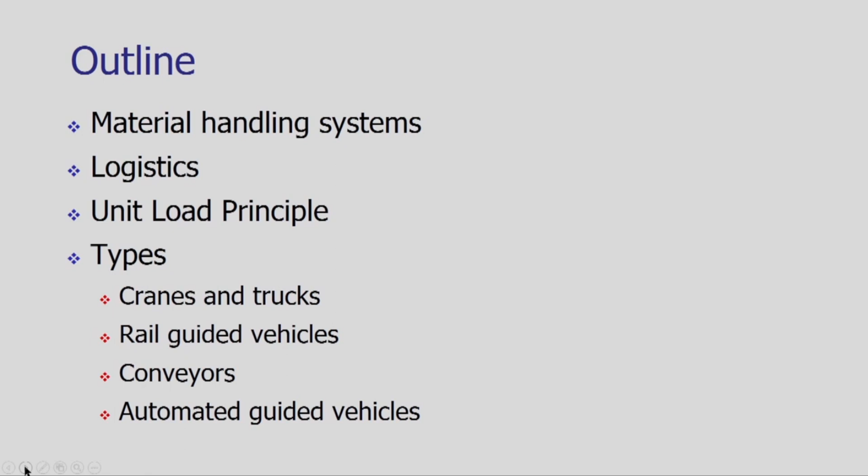So let us begin. In industry or in any shop floor, we are dealing with various materials, parts and products. The materials, parts and products are to be moved. We have to store them, we have to track them, and we have to make a record. And this is quite usual in any commercial infrastructure.

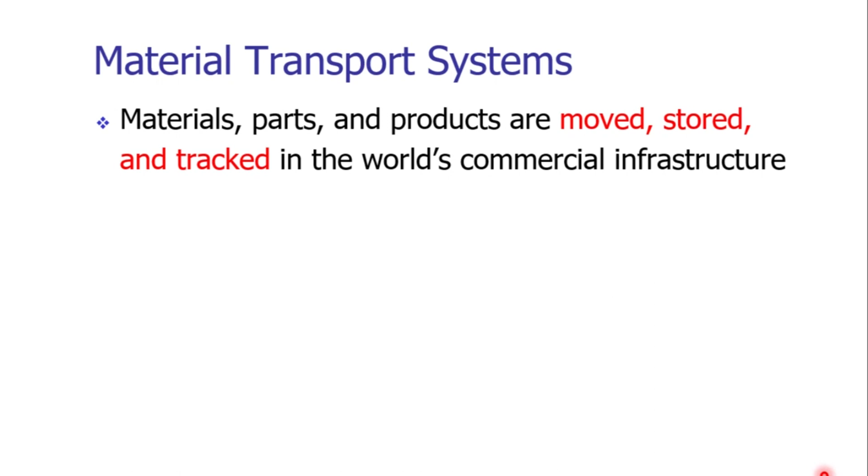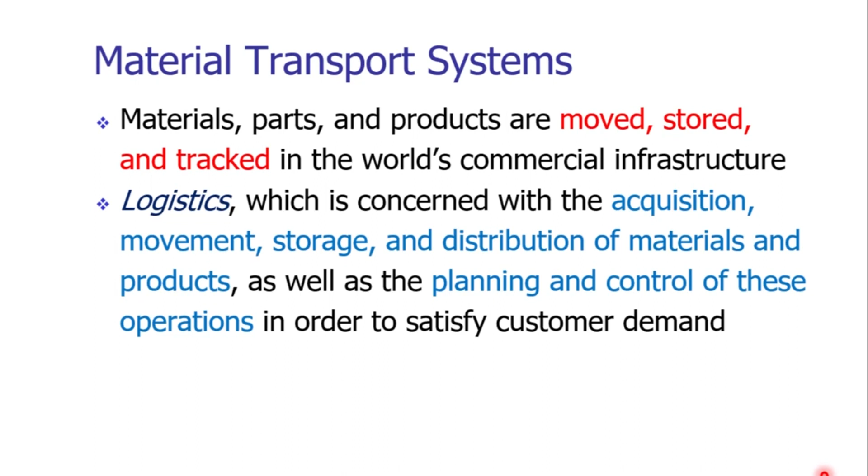The term logistics is often used in relation to materials. Logistics is nothing but acquisition of the material, parts and products, activities related to movement of these commodities, storage of these parts and products, and distribution of them in the factory or in the enterprise. It's not only acquisition, movement, storage, and distribution; the operations related to planning and control of these functions are called logistics. Of course, all these things we are doing to satisfy the customer demand.

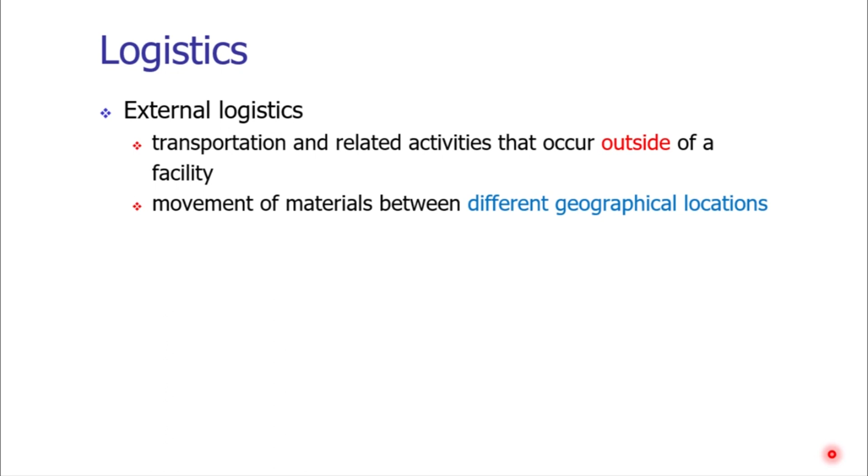Logistics can be external logistics or internal logistics. When we are transporting the goods or the product outside of a facility, the operations related to the storage and transportation of the goods and products outside the facility are called external logistics. When we move the material from one geographical location to another, it involves the transport of raw material, finished goods, semi-finished goods and products from the place of manufacture to the destination, which may be a market destination or a distribution destination.

We carry out the transportation of raw material or finished or semi-finished goods in external logistics through various transport systems such as rail, truck, by air, by ship, or by using a pipeline as well. Fluids, say water or petrochemical gases, are transported through pipelines.

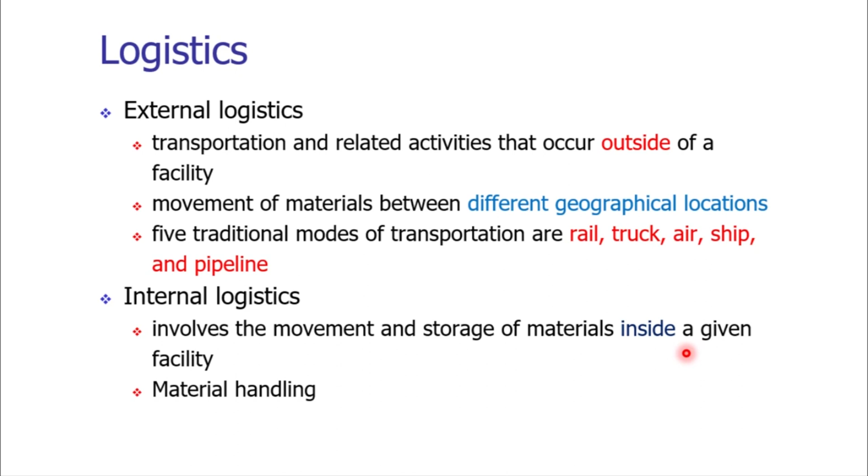In case of internal logistics, we are moving or storing the materials inside a given facility. In an enterprise, various things are needed, and when we are storing them, acquiring them and making a record of all the things, the operations related to this are called internal logistics. The basic and important element in logistics is material handling. In this lecture, we are studying the various material handling equipment that are important for automation purposes.

We need material handling equipment for a variety of operations. The first is the transport operation, and for that purpose we need transport equipment. We need equipment for positioning. We got the material over the conveyor at the destination, but we have to locate it at a proper place. We have to feed the tool to the spindle. So for positioning, we need certain mechanical equipment. These are called positioning equipment.

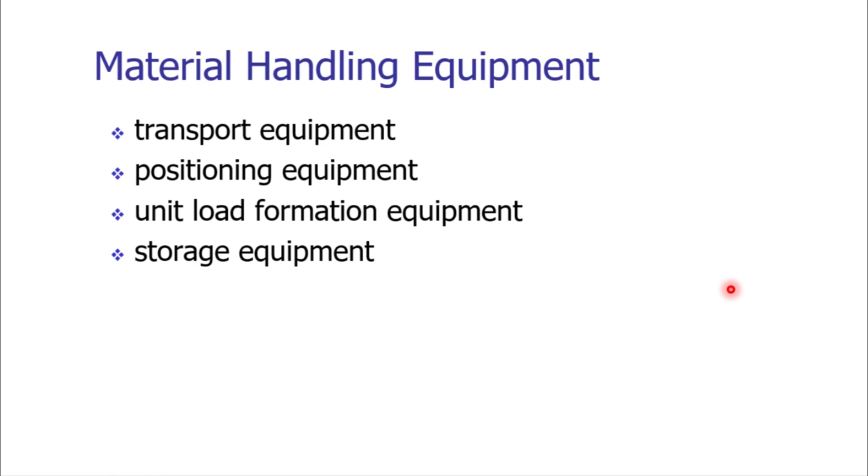Unit load formation equipment: we are taking the commodities together and storing them as a unit. To make the commodities into a unit, certain equipment are used. These are called unit load formation equipment. Storage equipment: a variety of equipment are needed to store the commodities at the workplace. Positioning means we are talking about a specific application. Storing means we need certain equipment to store bulk material, bulk commodities.

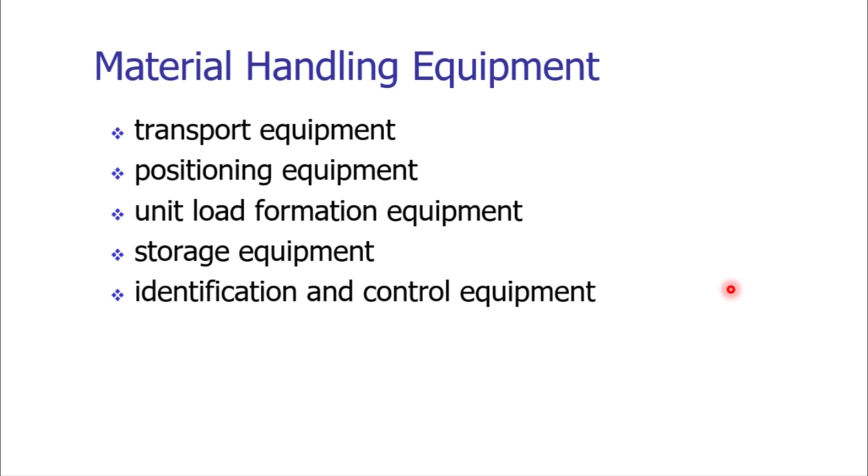In a factory, there are many equipment, tools, raw materials, and finished products. We need to have a proper, efficient record of all these elements. For that purpose, we should have automated identification equipment, and mechatronics based systems are used. It may be barcoding based technology or RFID technology. So identification and control equipment are the fifth type of material handling equipment required in automation in manufacturing.

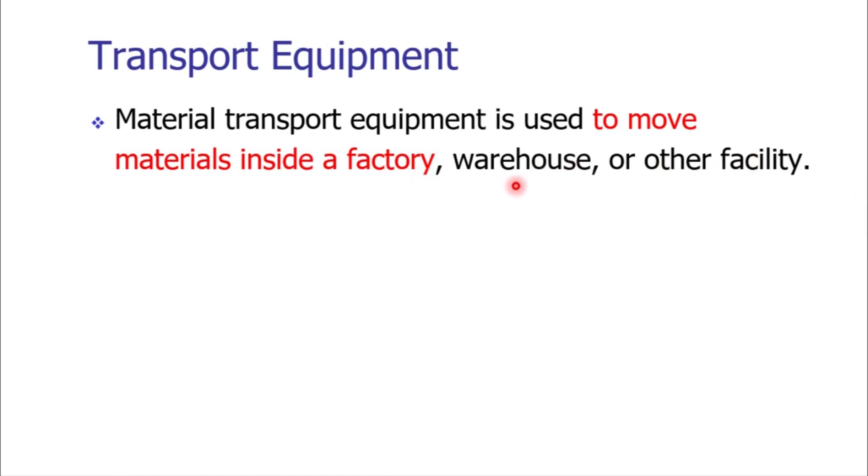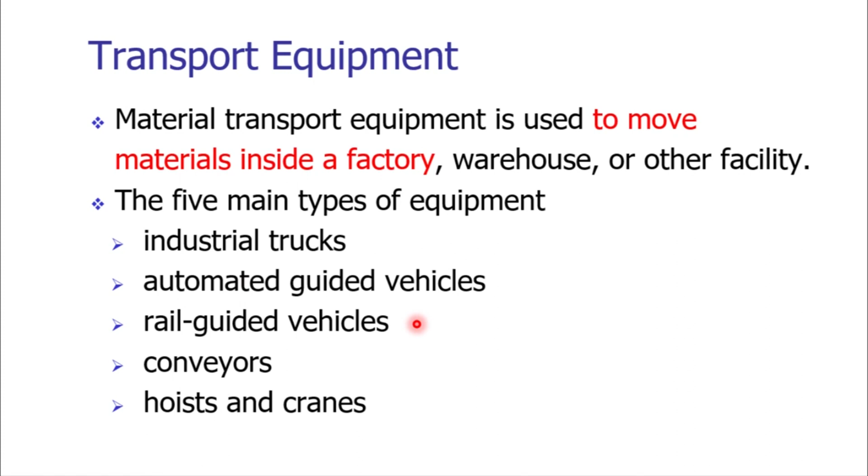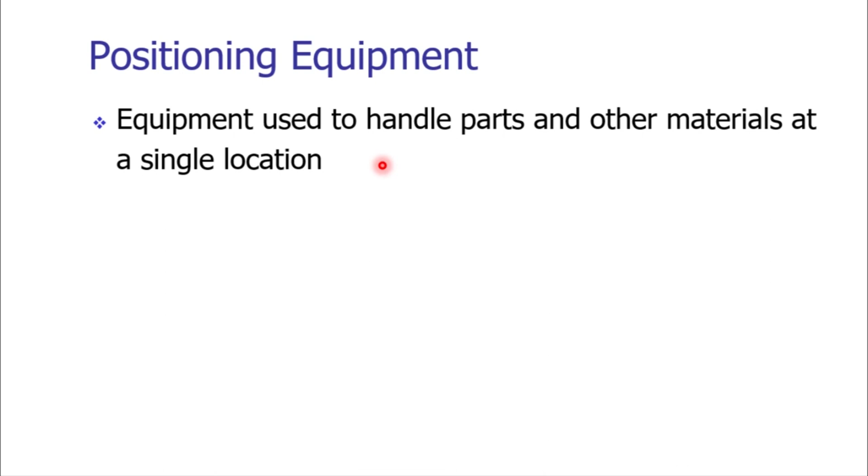The transport equipment, as I mentioned, are required to move the materials inside a factory, a warehouse or the facility. There are basically 5 types of equipment used: industrial trucks, automated guided vehicles, rail guided vehicles, conveyors, and hoists and cranes. Positioning equipment, as I mentioned, are used to handle the parts or materials at a single location only, say feeding or orientation of the tool in the machining center, or a pick and place arrangement at the ASRS.

The loading and unloading of parts from a production machine in a work cell can be treated as the best example of positioning equipment. In general, these activities are carried out by industrial robots, which perform the material handling and part feeding in automated assembly.

For positioning of bulky components or bulky tools, say dies, molds or machine parts, we use hoists, which lift the components and position them wherever it is required.

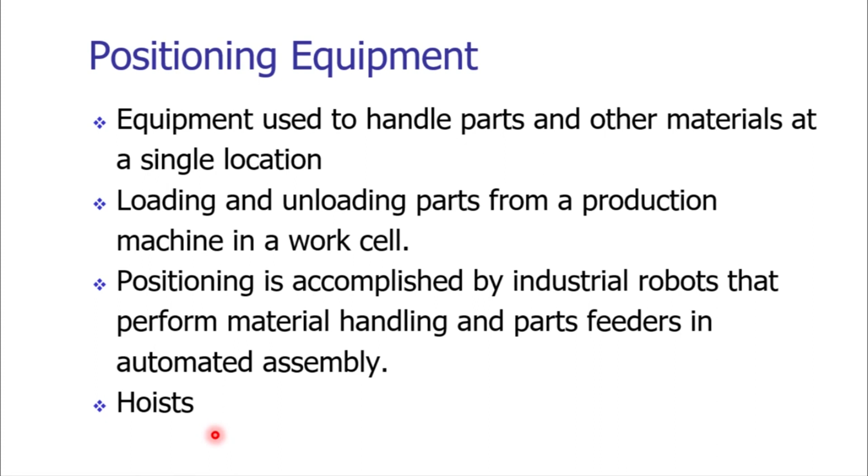Unit load formation equipment. Unit load formation basically deals with making a container which holds the individual items together so that we can easily handle them. So let us consider we have a wooden pallet. The wooden pallet is nothing but a platform of specified, standard size, over which we put the finished products, say boxes, over each other, and a specified number of boxes we consider as a unit of a pallet. After that, we wrap that specified number of packets or boxes together, and that will be considered as 1 unit of 50 boxes, 1 unit of n number of products.

We can also have a smaller version of the wooden pallet. This is a box or a basket kind of thing. In the tote box, we can have commodities such as food products, say fruits, berries or apples. So one tote box of apples will be considered as a unit load.

If the products are heavy, if the products are more, we can have a larger version of the unit load, and that is called the pallet box. In the pallet box, we can have products which are stored in a semi-finished way. So let us consider we are using certain raw material for some operation. We store that in a pallet box, and that will be utilized for the sub-assembly or the processing operations.

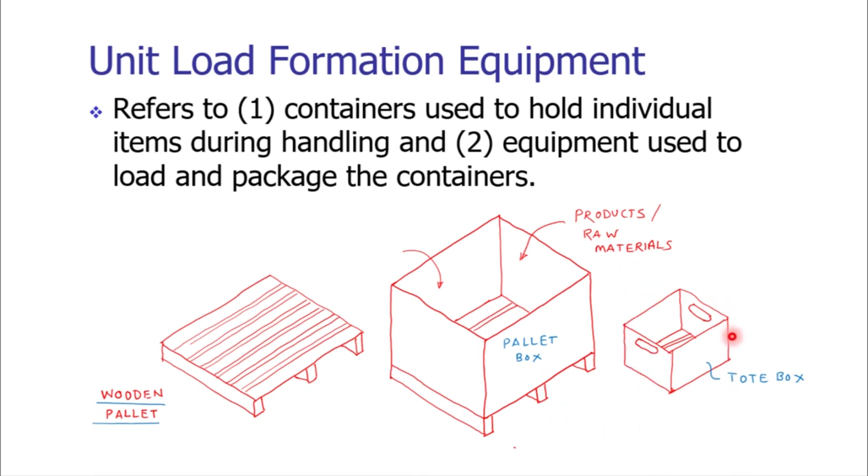Palletizing is basically an operation which automatically shrink wraps the plastic film around the unit load on the pallet, and that wrapped unit of products will be sent for shipping. So the operations related to shrink wrapping the plastic film are called palletizing. We need to arrange the products on the pallet so that they will not fall down, and then we have to wrap them using the plastic film. To carry out this operation, we need automatic machines. These machines are called palletizers.

In a similar way, we also need depalletizers. Consider we have a distribution center of the same enterprise. From the manufacturing unit, we get the palletized products. We now need to depalletize them and unload the cartons from the pallet. To carry out this operation in an automatic way, we need equipment. These are called depalletizers.

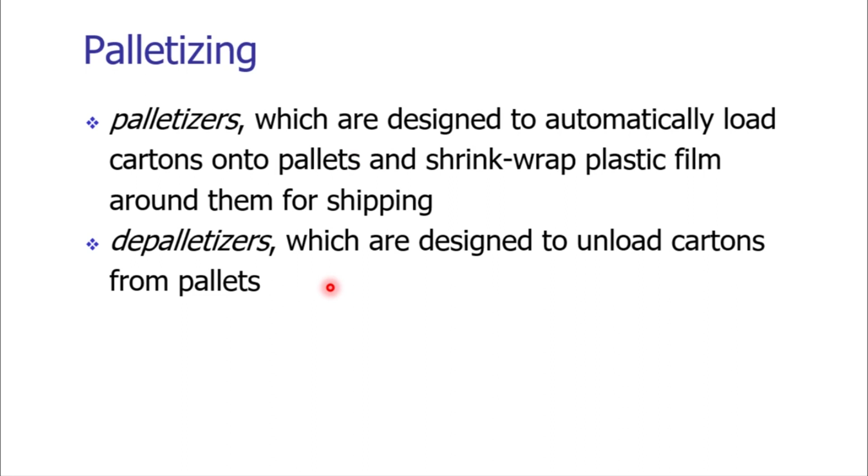Storage equipment. The conventional method is bulk storage, that is, on the open floor area. Consider food grain bags stored in a food grain godown. We stack the food grain bags, and generally this kind of storage is on the open floor area. Even in industry, we use the open floor area for stacking bigger size boxes or cartons.

The rack type of system is the more sophisticated way. The racks are designed to accommodate pallets. We prepare the pallets of the commodities or products, and straightforwardly we can put these pallets inside the rack system. The rack system may have specified numbers, they are coded basically, and we can easily automate the process of the rack system. Such systems are called automated storage and retrieval systems, which have automated racks.

We also use shelving and bins. Shelving and bins are utilized to store smaller components, say screws, nuts, various tools. We use drawers, but handling of shelving and bins is manual. It is labor intensive. Overall, handling of open floor area storage and rack system storage in a non-automated way is labor intensive. So for that purpose, we have to go for an automated storage system, which certainly reduces and eliminates manual labor.

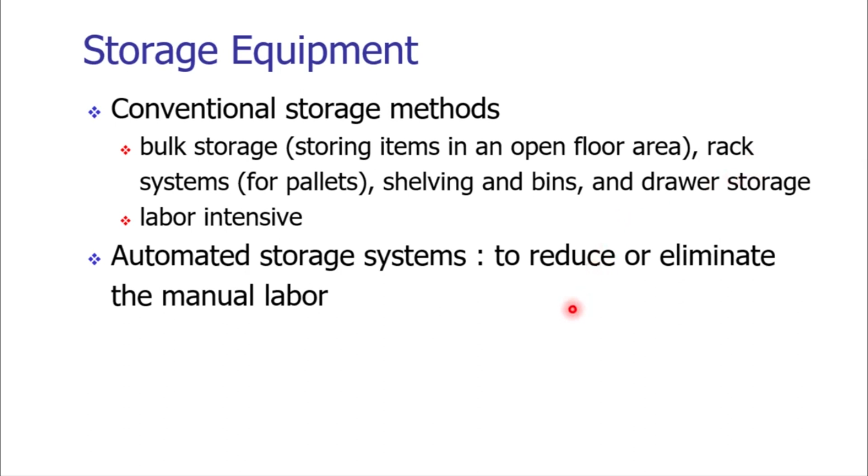When we are automating the process of storage in the racks and handling of the various items inside the rack, that will convert it into an automated storage and retrieval system. As I mentioned before, we have to identify and control these commodities or equipment in the shop floor. We have to keep track of these materials that are to be moved and stored.

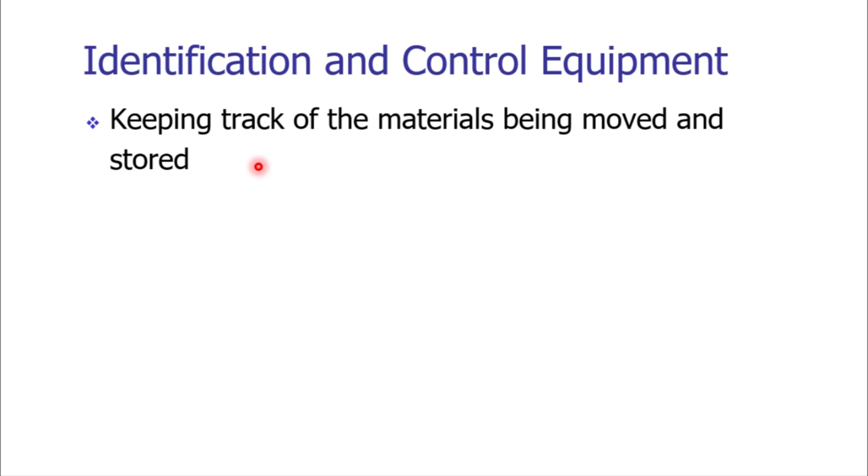So for that purpose, we are using barcode technology, which we often use in the retail markets as well. In the retail markets, in the garment markets as well, we are using RFID technology, that is radio frequency identification technology. Both these technologies are also used in industry. We are first providing the barcodes to the palletized unit loads, and then we can retrieve the specified pallet for either dispatch or for unpalletization or for its further utilization.

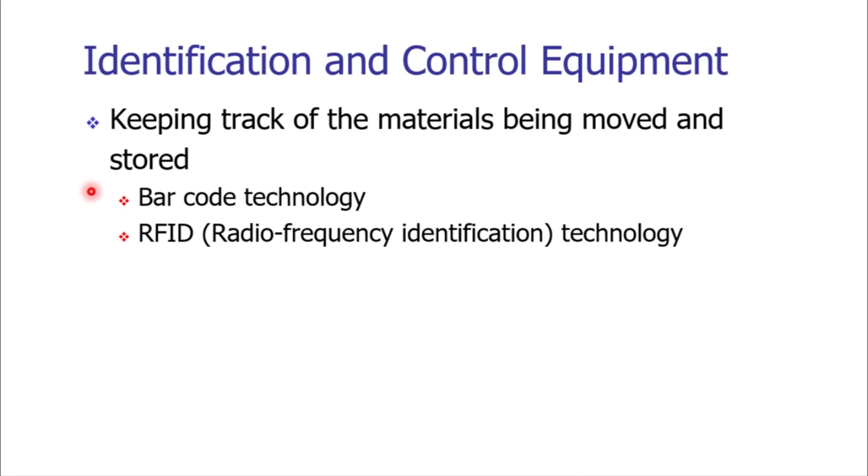Now, what are the various design considerations to be studied? The design of a material handling system basically depends upon the materials to be handled. So what type of material we are handling, what is the quantity and distance to be moved. So when we are choosing a certain material handling equipment, first of all we should know the type of material, whether it is a solid, a liquid material, or a gaseous product. So based on that, we have to choose appropriate material handling technology.

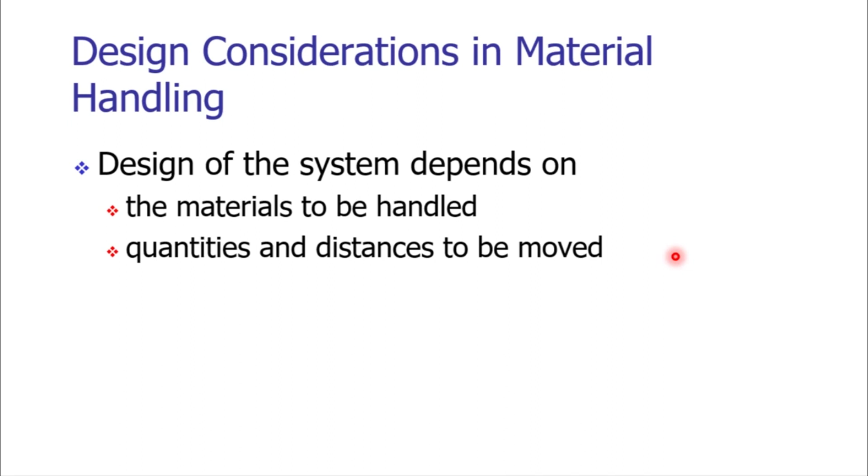Quantities, whether it is a low quantity, medium quantity or high quantity. Then the distance, for how long the material handling has to be carried out, for how long we have to transport the material inside the warehouse or the automated industry. So based on that as well, a suitable choice can be made with the available options with us.

Then what kind of production facility will be served by the material handling system? Whatever the products or commodities we are transporting, for which production operation we are utilizing them. Whether it is a machining operation, painting operation or packaging operation, how much precision is there, whether it is a clean room or non-clean room, or a general purpose shop floor. All these aspects are essential to be considered when we choose or design a material handling system. Of course, the next parameter is the budget, the cost.

So the type of material to be moved, the quantity or the distance to be moved, what kind of application of that material is there during the transportation, and the cost associated with that.

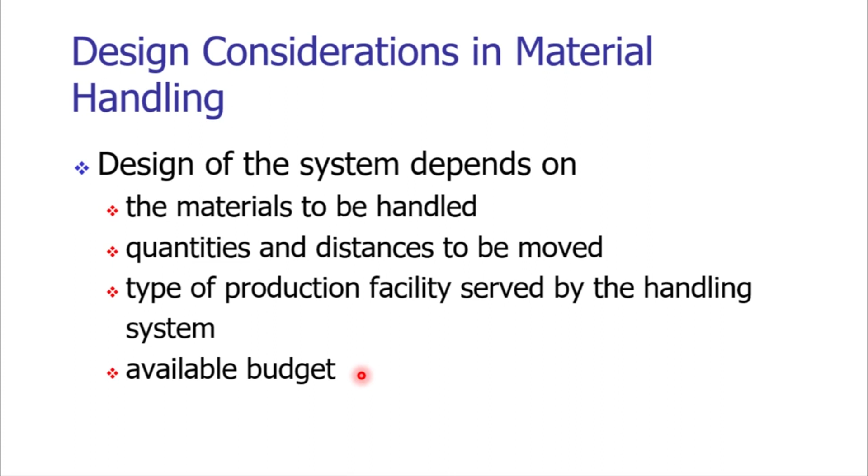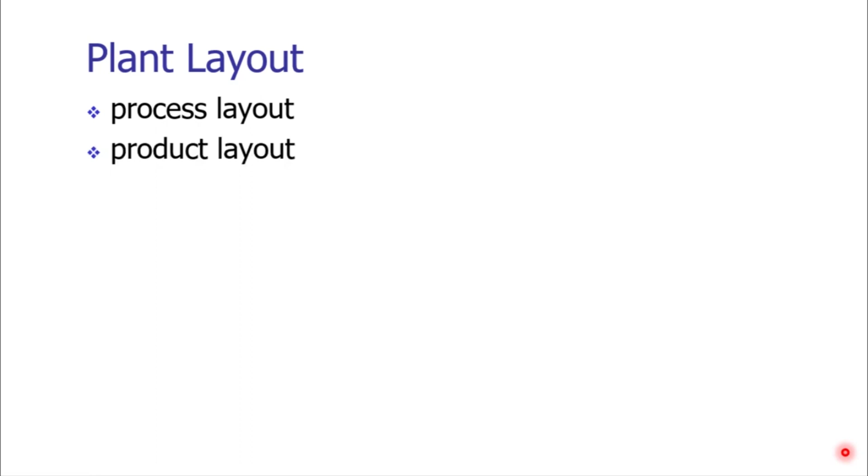During optimal selection of material handling equipment in automation, we have to consider the type of layout of the plant for which we are selecting the material handling equipment. In the industry, basically three types of layouts are used. These are process layout, product layout, and fixed position layout. The layout is nothing but the arrangement of the equipment or facility inside a factory. In process layout, we are arranging the equipment or the facility based upon the similarity of their utilization.

Also we have a testing and inspection or measurement lab where all the finished or semi-finished products will be tested, and tools will be tested and inspected. At the end, we can have the painting, packaging and palletization. So consider there is a part A which is to be processed at the lathe operation, then grinding, welding, then it will go to testing; it will not have any fitting related activity.

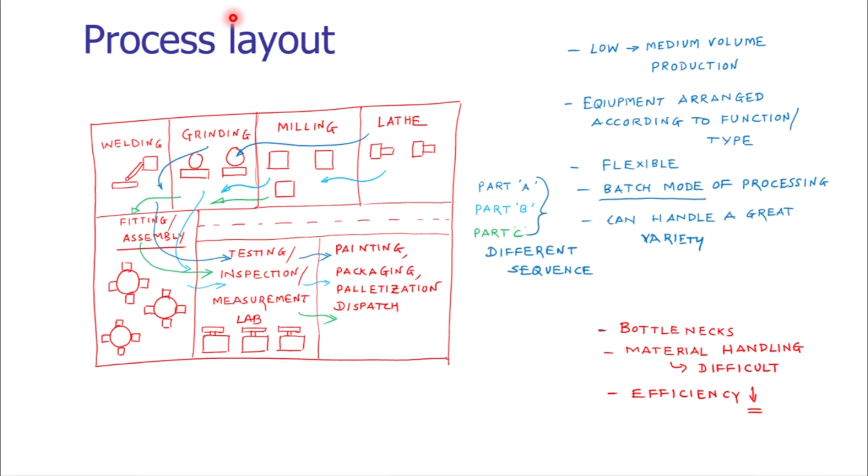Due to the bottlenecking as well, we cannot have efficient material handling. So material handling is difficult in a process kind of layout. Thus, the layout of the company, the layout of the factory, is an important aspect in selecting the material handling equipment during the automation process.

Consider a scenario of high quantity production. The company is having only one product and we have to produce the product at a high volume, at mass scale. In mass production, the production may be quantity based production. A quantity based production means manufacturing of screws and fasteners. If the company's objective is to manufacture only one product, that is the screw, we can have a special purpose machine. We are just producing a large quantity of screws and nuts per day. That's the product and we are just selling it. That is called quantity production, a single product, single commodity, which may not have any assembly.

The second type of mass production is flow line based production. A system is there and that system has a variety of subsystems. These subsystems may be produced in-house or some of the subsystems might be procured from outside; we are outsourcing them. At a rapid rate, we have to assemble the sub-assemblies, the parts which are either produced in-house or outsourced. So for that purpose, we have to have a dedicated transfer line. Such a production facility is called a flow line production facility.

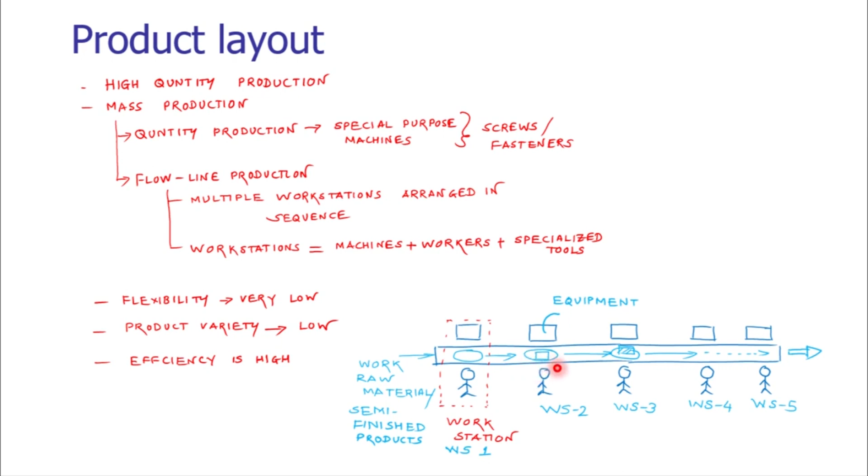But consider in certain cases we are having only one product, one system to be developed. Consider the case of aeroplane manufacturing or ship manufacturing, or we can have an example of railway locomotive manufacturing or heavy machinery. For such applications which are very heavy, very bulky, which are difficult to handle, very difficult to move from one shop to the other shop.

In this situation, we are arranging the workstation, we are arranging the equipment around this product itself, around the system itself. We are taking the machines, we are taking the equipment to the site itself, and then we are carrying out the processing. Such type of layout is called the fixed position layout.

Here consider we are building up an aeroplane, so we need the equipment. The equipment may be a machine. So to get the equipment from the storage to its workplace, we need to have certain material handling equipment. For that purpose, either we can go for forklift type of trucks, or we have to go for the hoist or cranes. We cannot use conveyors here, because if you lay down the conveyors, that will definitely obstruct the material movement of the other operations.

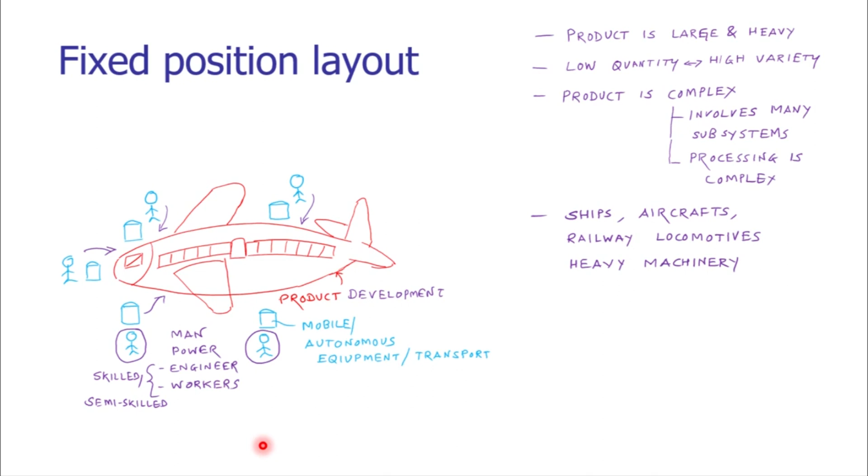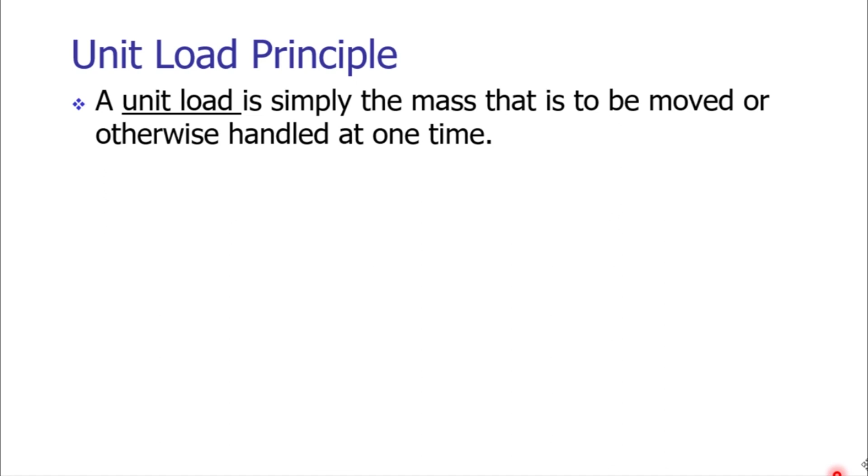So we have seen the term unit load. So let us have the formal definition of the unit load. The unit load is simply a mass that is to be moved or otherwise handled at one time. The unit load may comprise either one part, say only one product or a system which we are putting on the pallet, or we may have a container with multiple parts. These multiple parts are loaded on the pallet, then we are palletizing them, then we are wrapping them with plastic.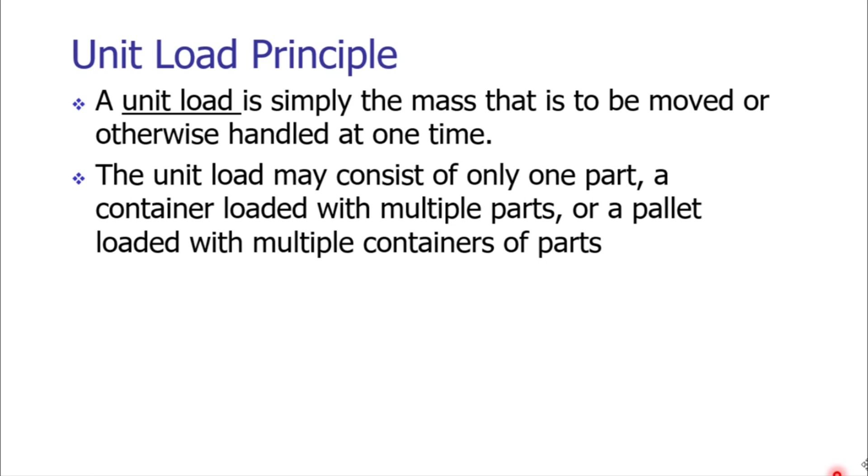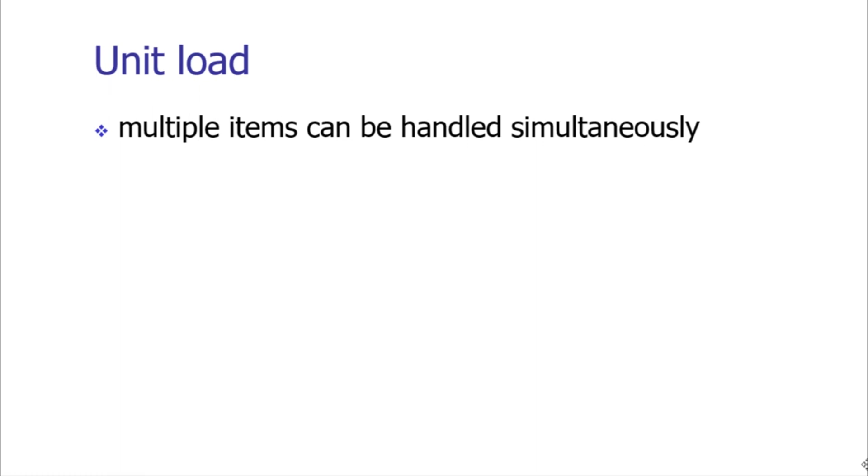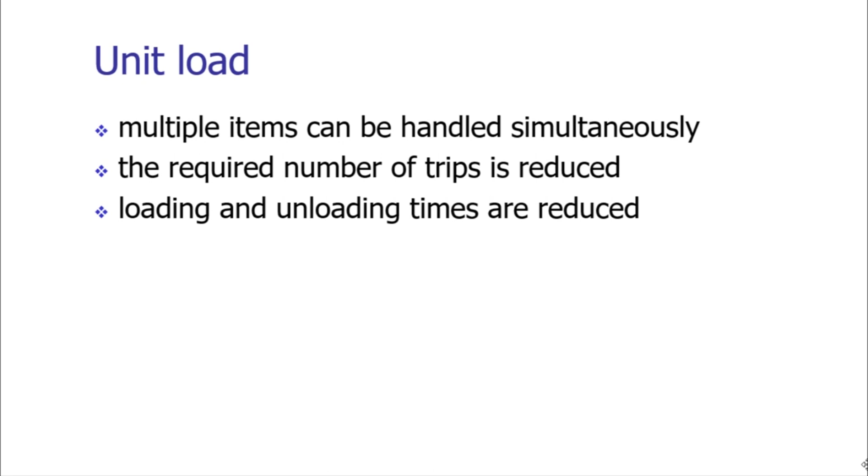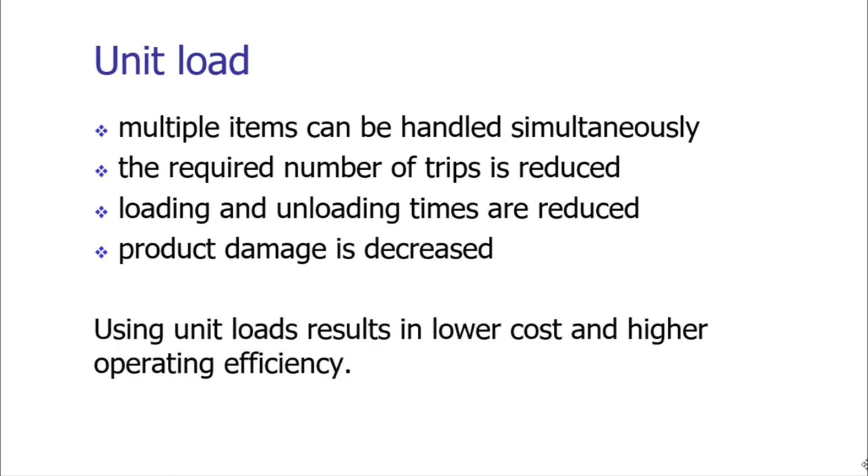We are not handling a single box or a single product. We are handling multiple items which are temporarily bound together. Since the handling is efficient, the product damage would be less. Thus, by using unit loads, we can reduce the cost and we can increase the efficiency.

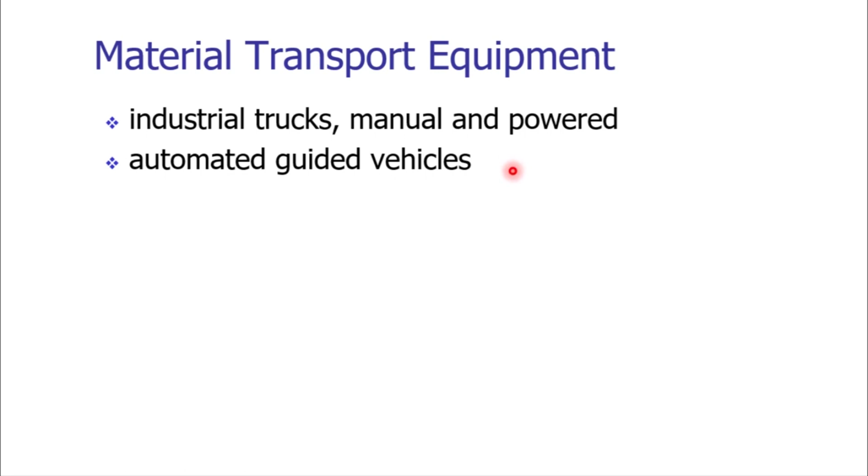There are many transport equipment used in the industry: industrial trucks, which may be manual or powered, automated guided vehicles, rail guided vehicles, conveyors, cranes and hoists. Some simple equipment often used on the shop floor are the industrial trucks. Some examples are there on your screen.

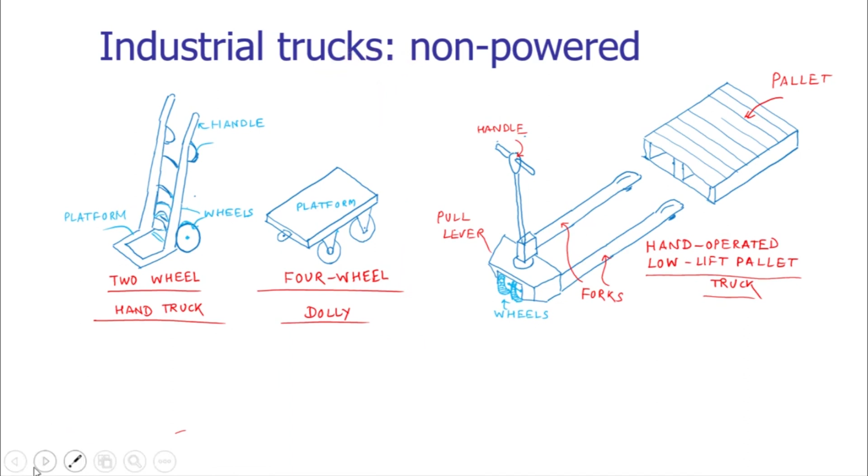As far as the automations are concerned, we are using the powered trucks. Though they are manually operated, these entities are very much useful in semi-automated industry. When we are talking about material handling in process layout or in fixed position layout, to handle the bulkier component, say dies and molds or the tools or the raw material, we need to have an equipment, that is the powered truck or the forklift truck.

So this is a typical arrangement. You can see here we are having the forks and there is a hydraulic system. Hydraulically we are lifting the forks. The lifting is comparatively very high. There is a frame and it is having a very heavy engine. That engine is operating the hydraulic system as well.

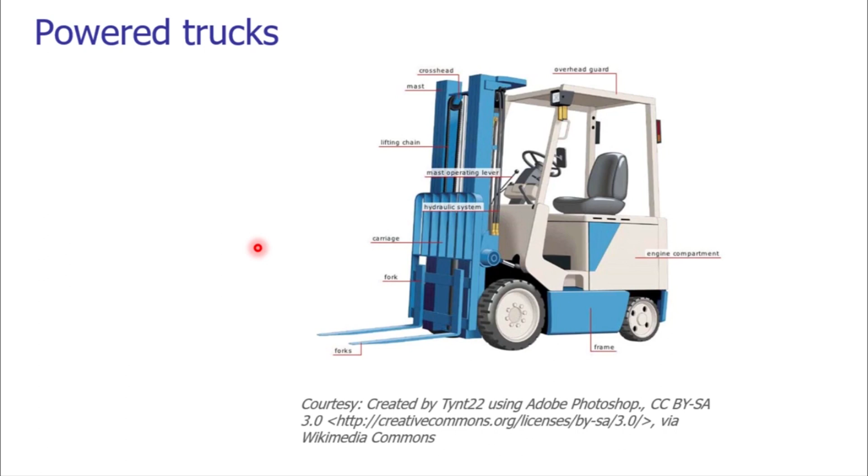By using the hydraulic system, we are operating the forks and the forks are lifting and then we are maneuvering, transporting or conveying the commodities at their desired location. Automated guided vehicles are widely used in automation. These are independently operated, they are self-propelled vehicles, they are guiding themselves. The AGVs are having onboard batteries. The battery life may be around 8 to 16 hours.

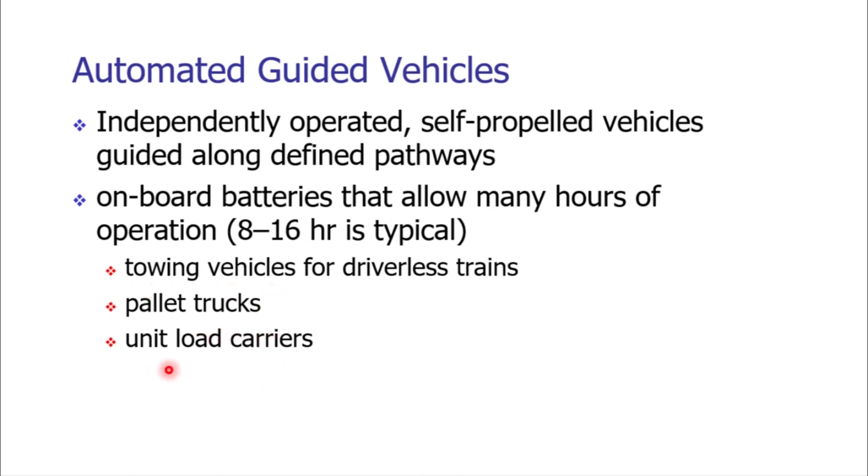There are basically three types of AGVs used in the industry. These are towing vehicles, pallet trucks, or unit load carriers. On your screen, you can see a pallet truck, it's a driverless pallet truck. It is remotely controlled by a central computer, or it is self-propelled or self-controlled as well. It has the forks, and over the forks, a palletized commodity can be seen.

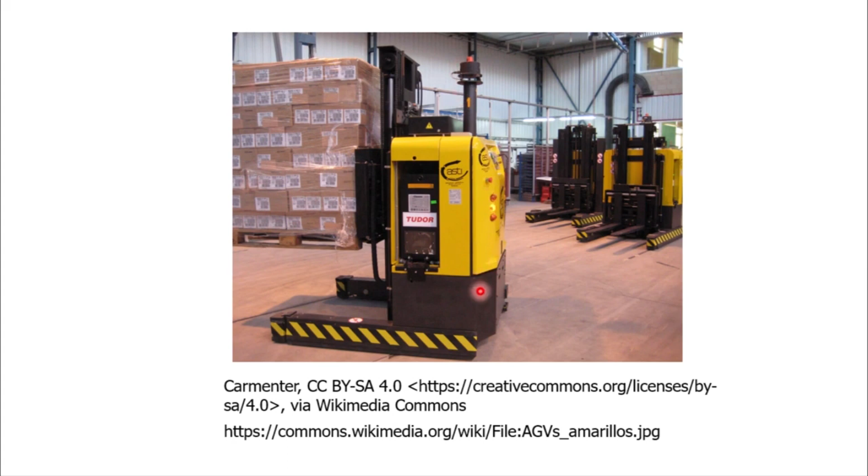So this is the wooden pallet over which a unit load is placed. The unit load can easily be handled by the forks of the AGV. The AGV is having the capability of controlling remotely, wirelessly. This is another variant. It is the unit load carrier. This unit load carrier is having low height and we can handle only the typical unit load for which it has been designed. Only one pallet at one time is being handled by such system.

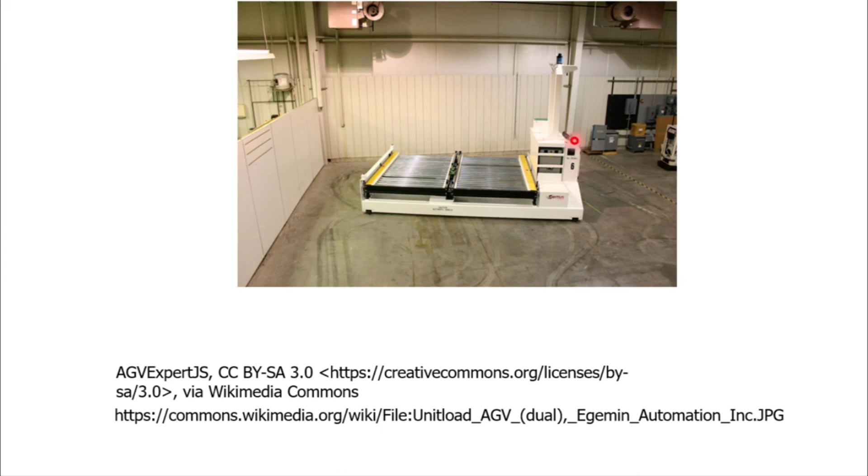The next one is the towing vehicle. Consider we are having an AGV which is driving, which is taking along with it a dolly, and over the dolly we are having the pallets. So we can have multiple dollies arranged in sequence, and based upon the capacity of the AGV, it can drive the dollies. The AGVs are providing the driverless train operations. We can efficiently handle the storage and distribution.

The AGVs are basically used for automated storage and distribution of commodities or the raw materials. AGVs are the integrated part of ASRS, automated storage and retrieval system, which we have seen in our very first week of this course. We have seen one video where ASRS is taking assistance of the automated guided vehicle. How are the AGVs helping? The AGVs are feeding the automated storage and retrieval system.

They are getting the unit loads on pallets from the receiving dock. Consider a truck of raw material has arrived in an enterprise and it is having multiple unit loads. Now AGVs will go to this dock, they will receive the unit loads, the pallets, and then they are feeding the pallets to the ASRS in a systematic manner. The ASRS system is placing these items into the storage.

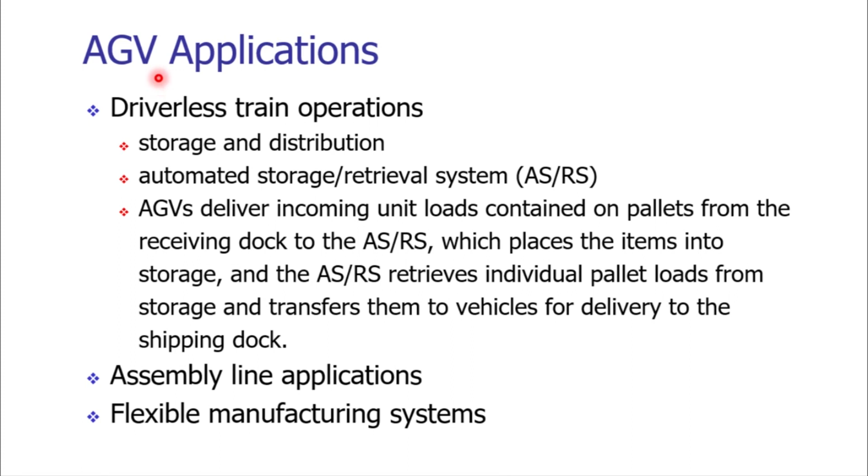There are basically 5 types of guidance technologies used in the navigation of automated guided vehicles. We can use either the embedded wires which are guiding the AGVs. We can have paint strips or magnetic tapes.

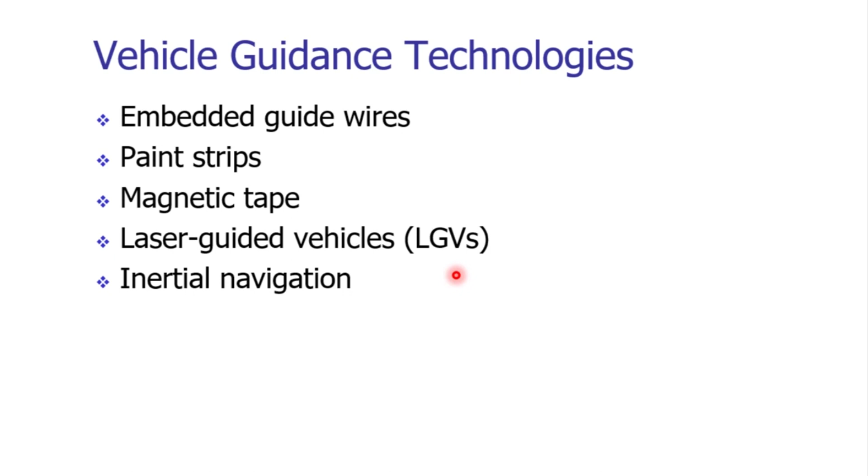Some of the guided vehicles are working based upon utilization of the laser based technology. These are called as the LGVs, the laser guided vehicles. We can also use the gyroscopes for the navigation purpose. These are called as the inertial navigation based AGVs.

Embedded guide wires based technology: we are cutting a slot over the shop floor, and in that slot we are embedding the wire which will be guiding the AGVs. This wire is generating low frequency signals based upon the input which is given. The frequency is around 1 to 15 kilohertz. Due to these low frequency signals, the magnetic field is getting generated, and that magnetic field will be utilized to navigate the AGV along the defined path.

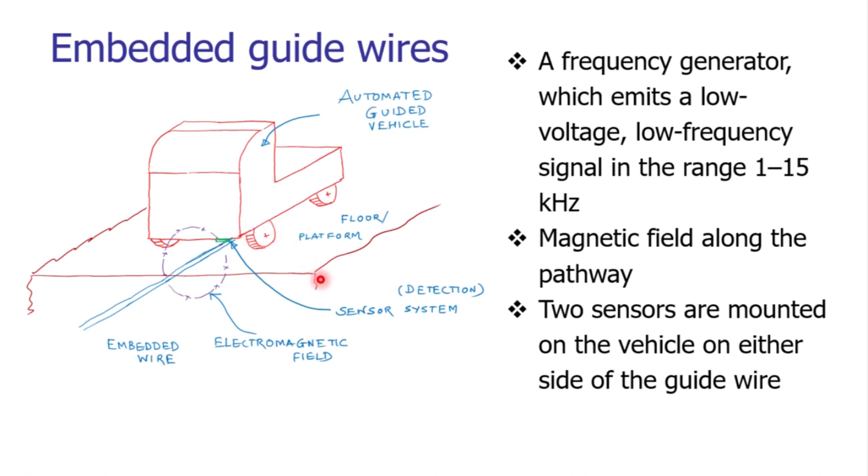The magnetic field will be sensed by the induction based sensors. On your screen you can see the automated guided vehicle which is having the sensor arrangement at its bottom, and the sensor is sensing the magnetic field which is generated by the embedded wire. According to the sensor signals, the navigation or the control unit of AGV will control the speed and direction of movement of the AGV. So what will happen when we are working in loops or branches or side tracks?

To handle these situations in embedded guide kind of technology, we are working with the frequency select method or the path switch select method. In frequency select method, the guide wires in two separate paths are having different frequencies. So in the loops or in the branches or in the side tracks, when we want to change the track, we can have the different frequency of the electrical signals which are there in the guide wires.

So when the central computer is giving instruction to the AGV, or the program of the AGV itself is having the instruction to select a particular frequency or to look for a particular frequency, if that frequency is available along the branch path, the AGV will follow that. So at branching, if the programmed frequency is matching with the available frequency of the branch path, the AGV will follow that particular path. Or we may have the path switch select method.

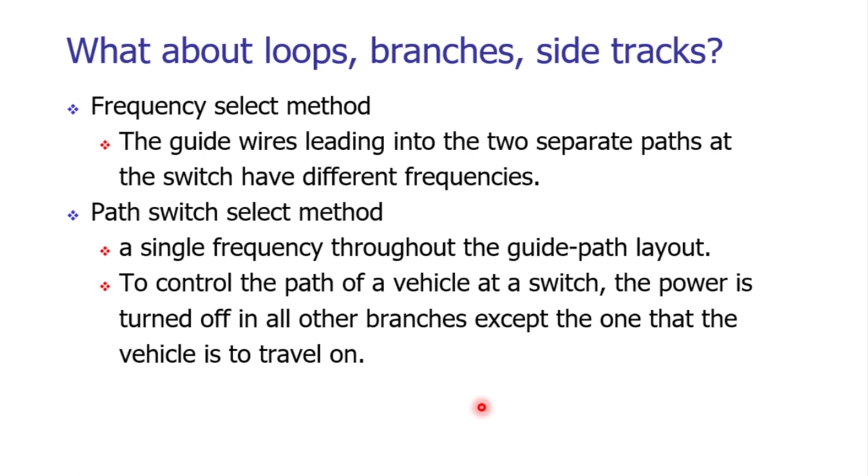So when we are having the options, the option that is to be chosen, we are giving the electrical signals to that particular option only. The electrical signals or the magnetic fields at all other paths will be switched off. So we are switching off the electricity to all other not required paths. Whatever the path is to be utilized, that particular path signal will be on. As it is on, the AGV will follow that particular path and it will convey the product along that path only.

We can have the navigation by using strips which are painted. These strips are having fluorescent particles which are reflecting the ultraviolet light. The onboard sensor of the AGV will detect that light. It is a phototransistor. It will detect the light and accordingly it will get maneuvered along that particular path.

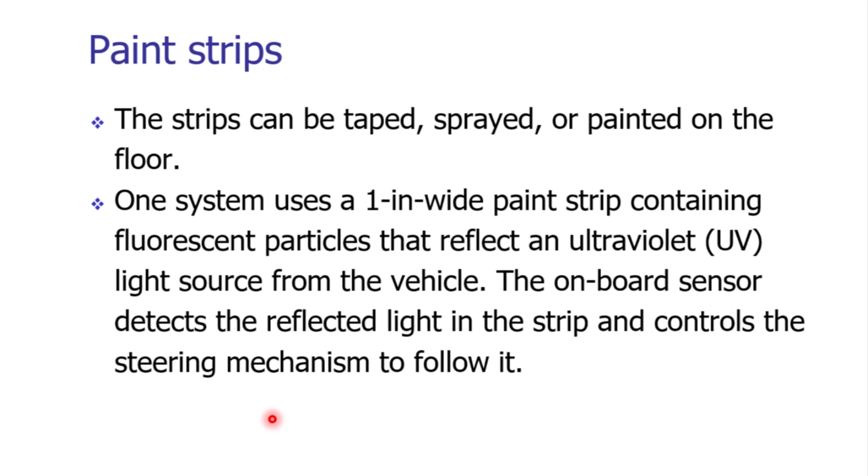We can also have the magnetic tapes. So instead of having the painted arrangement, we can have the magnetic tapes which are installed on the floor surface along the defined pathways. The magnetic tapes arrangement is avoiding the cutting of floor surface, which is there in the embedded wire technology. We have to cut the floor system, so that can be saved by using the magnetic tape arrangement.

We can easily redefine the path. If we remove the magnetic tape from the floor, we can rearrange, we can relocate the magnetic tapes and we can change the path very easily. The magnetic tapes are generating passive signals. In the embedded wire technology, the active signals are being generated, but in magnetic tape it is passive signals, which of course need to be converted into active signals by using signal processing devices.

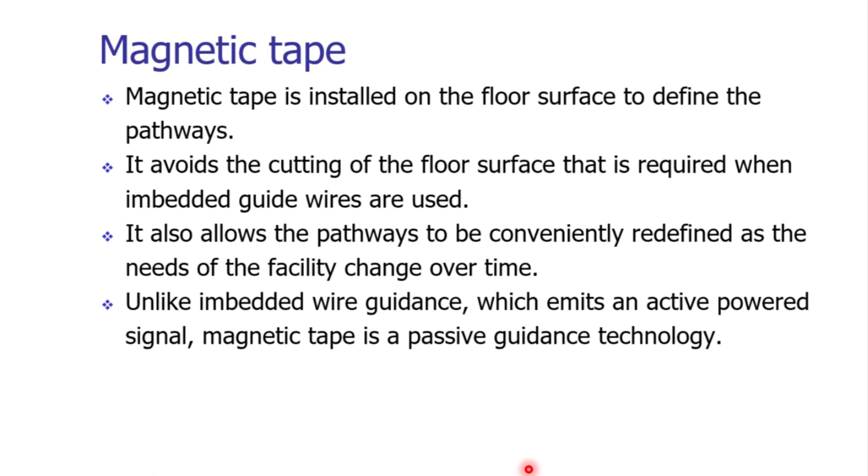We can use lasers for the navigation purpose. In laser-based AGVs, there is no need of any wire which is embedded. There is no need of any magnetic tape, or we may not require the painted strip on the floor. In laser-based AGV, we are using a combination of dead reckoning and reflective beacons. A beacon is a mechanical element which is having reflectors on it.

Various reflective beacons are arranged in the plant and the AGV is having a laser. The laser is being continuously transmitted from the AGV. That laser will strike the beacon and from that beacon it will get reflected. The reflected signal from the beacon will be stored inside the processing unit of the AGV.

And that stored information will be utilized to know the current position of the AGV, and it is utilized to compute the destination that is to be achieved. Dead reckoning is a term that refers to the capability of a vehicle to follow a given route in the absence of a defined pathway in the floor. So it is basically a system which is making the AGVs capable of finding the path or following a path when a defined pathway is not available on the shop floor.

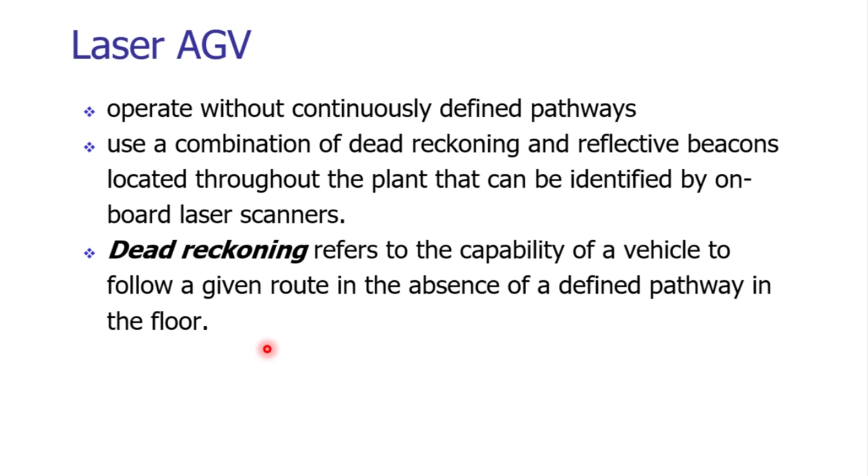We are not having any embedded wire technology. We are not having any magnetic strips. We don't have any painted strips over the floor. The AGV is free to move, and based upon the beacons which are available, based upon the programming it is having, the AGV is taking its own control and it is moving on its own inside the shop floor. So this particular capability of having navigation control in the absence of the defined pathway is called dead reckoning.

In the laser AGVs, the movement of the vehicle along the route is obtained by computing the required number of wheel rotations. So during the movement of the AGVs, the number of rotations of the wheels are computed. A servo motor or a stepper motor may be there, and that number of rotations is utilized to get the required location of the AGV. The computer is computing the present location of the AGV based upon the number of rotations. Of course, the steering angles also need to be considered to get the required destination as well.

Inside the factory, the reflective beacons are located strategically at a variety of places. The lasers are sending the laser energy, that is photon based energy, and the AGVs are getting reflections. The reflections received from 3 beacons inside the shop floor can be utilized for triangulation, to find out the present location of the AGV. Of course, the reflections from the beacons and the methodology of dead reckoning made the AGVs self-propellant, self-sufficient to take their own pathway inside the factory.

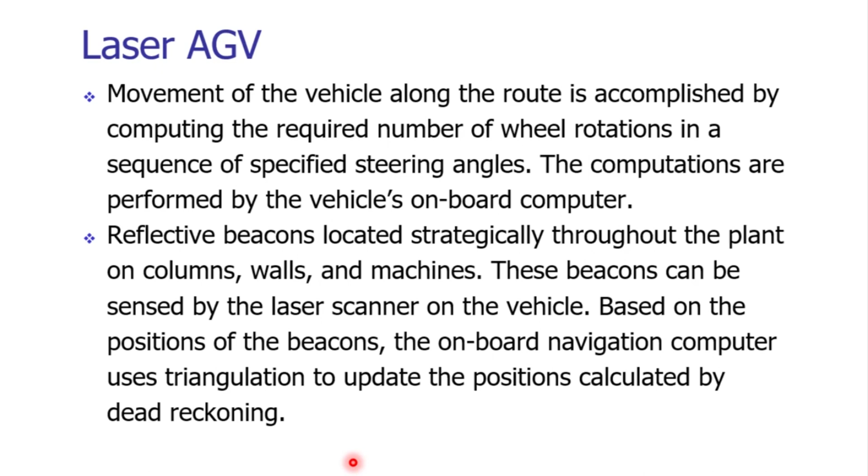We can also have inertial guidance. In inertial guidance, basically we are using onboard gyroscopes and motion sensors to determine the position of the vehicle by detecting the changes in the speed and acceleration. So gyroscopes are mounted, and these gyroscopes and motion sensors are continuously computing the speed and acceleration, and based on that the microprocessor of the AGV is continuously recording the position of the vehicle. Similar technology is used in aircraft, submarines, and missiles.

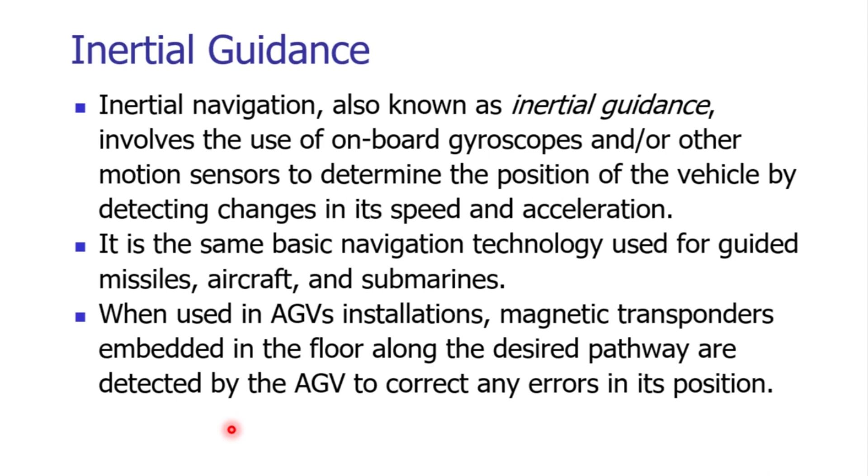In addition to the gyroscopes, these AGVs also have magnetic transponders which are embedded in the floor. These are additional systems ensuring whether the AGV is following the correct path or not. So basically, the AGVs are very much useful in process layout kind of manufacturing automation. In the manufacturing industry, we are using cranes to handle or to lift heavy loads, heavy parts. The heavy loads or heavy parts may be dies, molds, machinery, raw material.

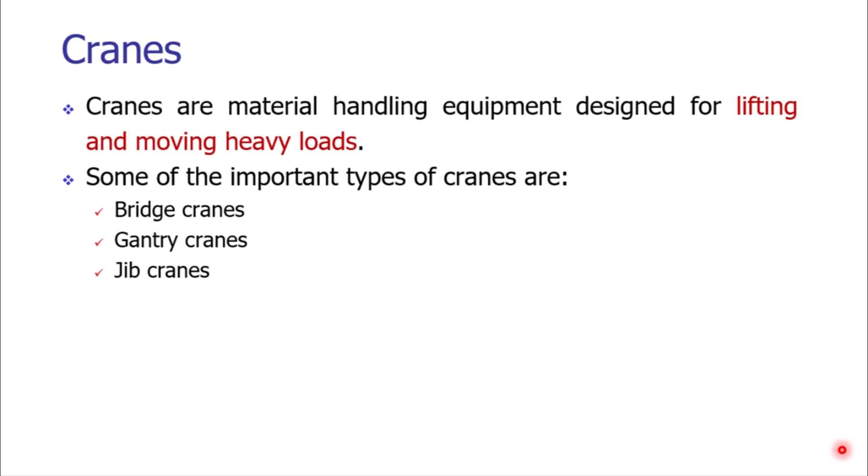There are 3 types of cranes which are used in the industry: bridge crane, gantry crane, and jib crane. In a bridge crane, there are one or two horizontal beams which are supported on fixed rails on either end, and these horizontal beams are moving in the direction perpendicular to the plane of paper. These horizontal beams are hosting the hoist. This is the hoist, and this hoist is moving along the X direction. We can move the hoist along the length of the horizontal beam. So let us consider this is the x-axis movement of the hoist trolley.

The horizontal beam is moving perpendicular to the plane of paper, that is the Y direction, and that perpendicular movement is possible by using these two rails. These rails are supported by supporting columns. The end of the hoist can be moved along the vertical direction, that is the Z direction. It will come down, it will lift the object, and then we can move the object or the product along the X direction or along the Y direction.

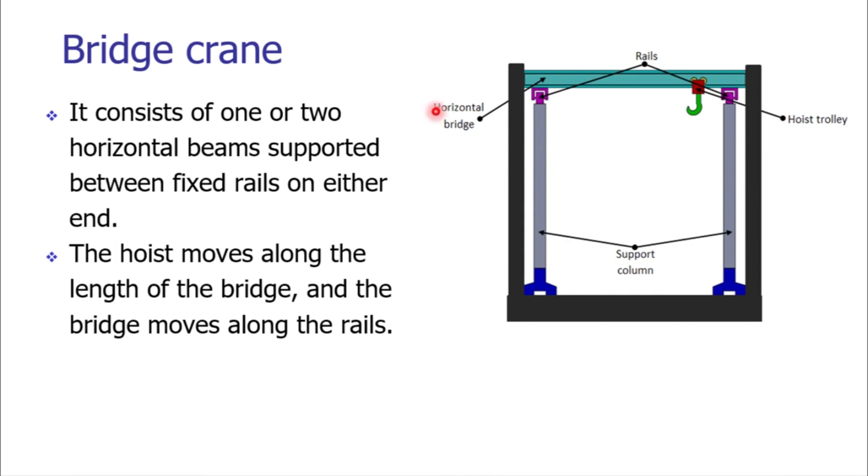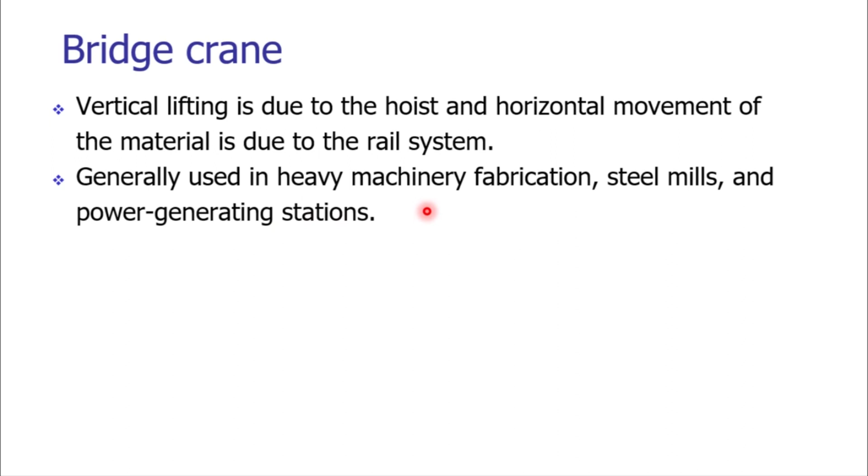The bridge crane is basically used to handle heavier objects. So in big manufacturing industry, when we want to handle very huge size work parts, components or machinery, bridge cranes are utilized. In a bridge crane, the vertical lifting is carried out by using the hoist, whereas the horizontal movement is done by using the rail system. So as I mentioned, the bridge crane is used to handle heavy machinery, in steel mills, and it is basically used in power generating stations where we need to handle impellers and turbines of a large size.

The next version is the gantry crane. It is very similar to the bridge crane itself, but the handling capacity of the gantry crane is lesser than the bridge crane. In gantry crane, we are also using a bridge which is supported at one end on the runway and the rail, which is hosted on a support column.

The other end of the bridge is supported by a gantry leg, and the gantry leg is moving over a rail. The arrangement of the gantry crane is smaller, and we can handle small or medium type of work parts. Not very huge work parts are being handled by the gantry crane. The gantry crane we can move inside the warehouse, inside the shop floor or the factory. We can take the crane anywhere we want and we can handle the work parts.

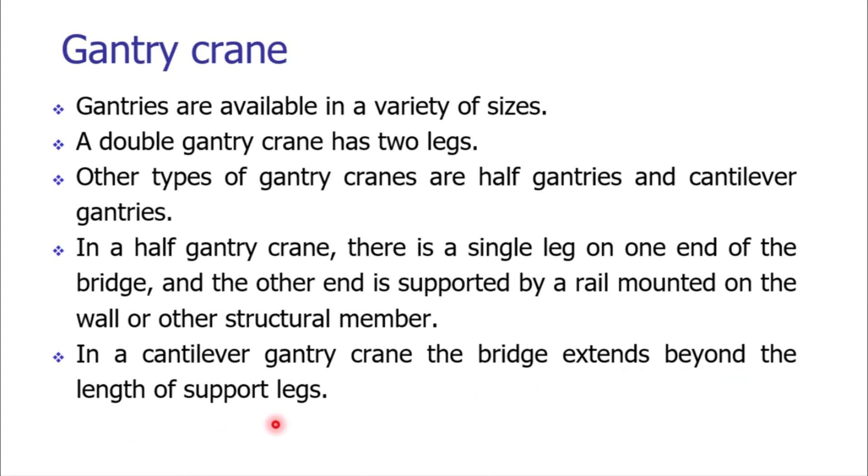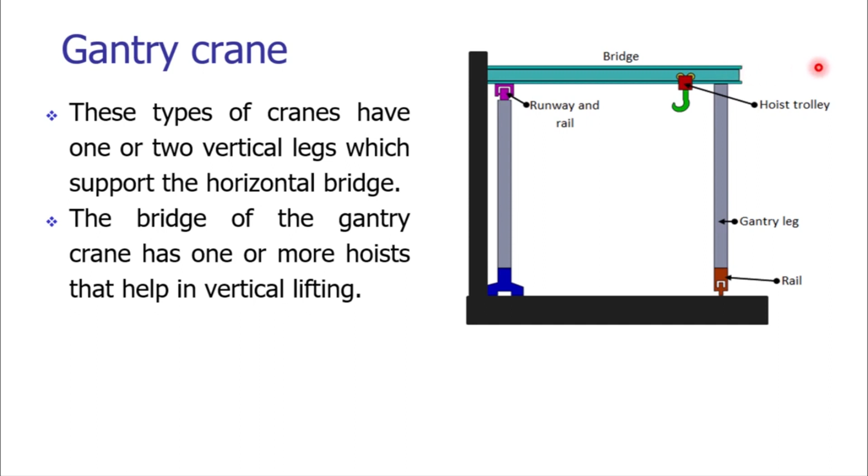The third variant of crane is jib crane. In jib crane, we are using a movable arm which is pivoted to a fixed column. This movable arm is hosting the hoist. Hoist can be moved along the length of the arm. Suppose there is the work part or the commodities which are placed on the floor, the hoist will come down and will lift it. The movable arm can rotate about the axis of the fixed column.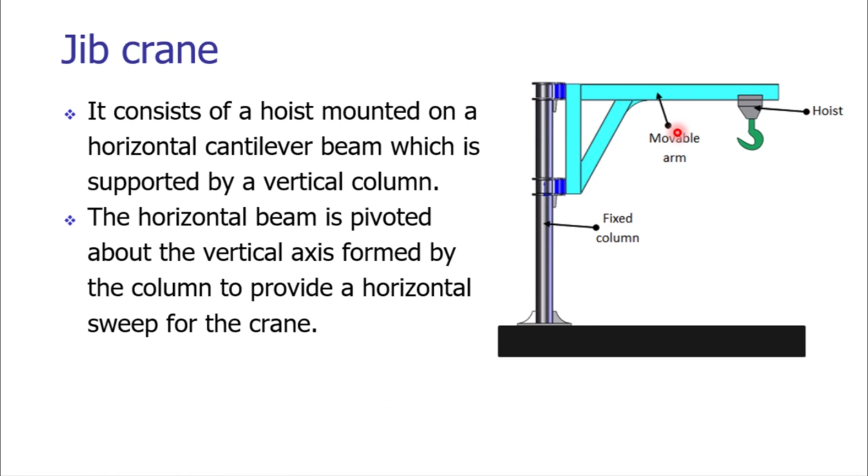So it can rotate about this axis so that we can cover up considerable area inside the shop floor. The hoist is moving along the length of the movable arm, and the horizontal sweep of the jib is circular or semicircular. So if it is circular, it can cover up the considerable area and we can utilize the jib crane for wide variety of applications. The movable arm is providing the radial travel to the hoist. So we can have the radial travel along this direction away from the center of the column.

The movable arm can sweep about the jib axis. It may be circular or semicircular form. And the hoist is moving in a downward direction, lifting the work part up, and then it is moving in the upward direction. Then either it can move in a radial direction towards the center of the column, or it can be rotated about the column of the jib crane itself.

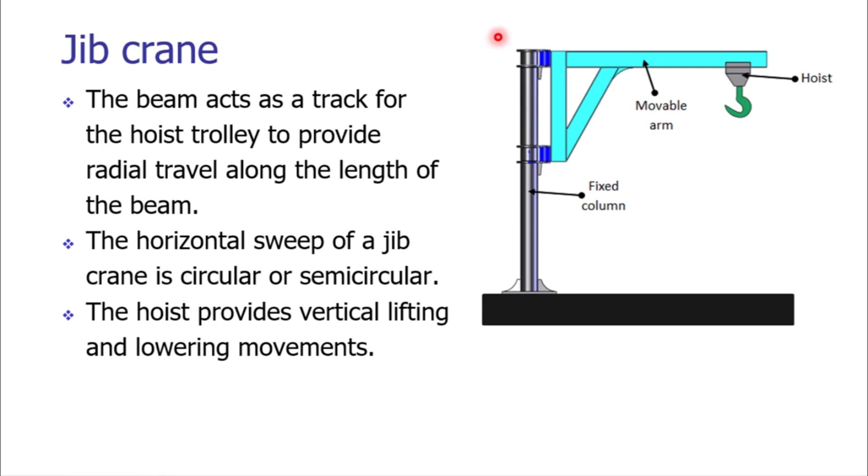The manufacturing industry also employs rail guided vehicles. These equipment are consisting of motorized vehicles which are guided by fixed rail system. The typical motorized vehicles are there which are fixed to the rail system. These vehicles are self propelled. They are getting propelled by themselves only. They are operating independently and are driven by electric motors. So these are the electrically driven vehicles and they pick up the power from the electrified rail.

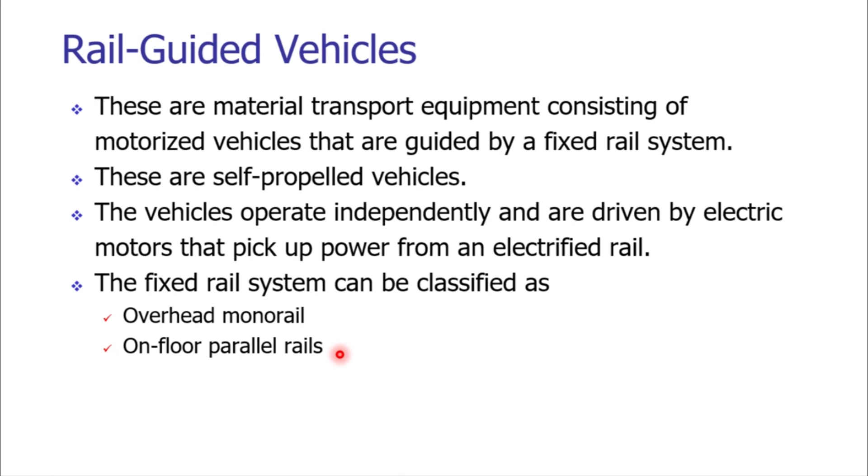We can have basically two classes of the fixed rail system, and these are overhead monorail or on floor parallel rails. In overhead type monorails, the rails are suspended overhead. They are suspended from the ceiling. As the work parts or the machinery or the raw material is being carried out in overhang position, we can save a lot of floor space when we are employing the monorails. The work parts are moving along the rails which are mounted above the floor space. So the ground space can be utilized, it can be saved for other operations or some other purpose as well.

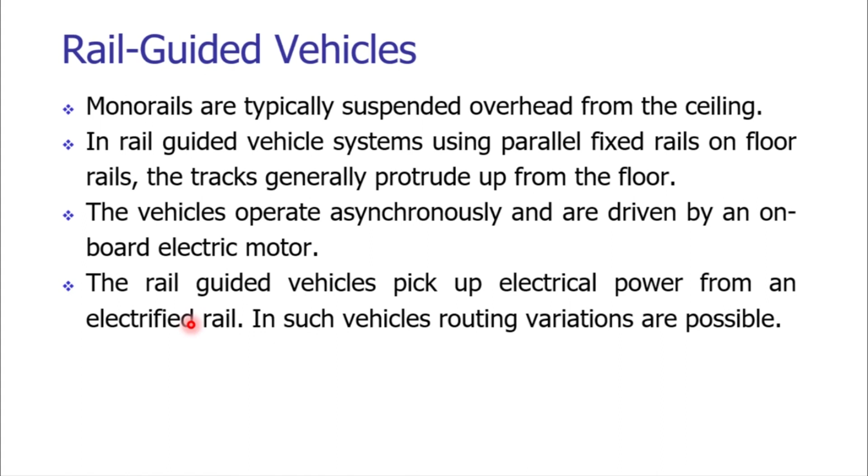In rail guided vehicle systems using parallel fixed rails, the tracks generally protrude up from the floor. So we are having typical rails which are protruding up from the floor and over which the vehicles are moving. The vehicles are moved in an asynchronous way and they are being driven by the onboard electrical motors. Basically, the rail guided vehicles are picking up the electrical power from the rail itself, and in such vehicles we can easily have the routing variations. We can change the route or we can change the speed of the electrical vehicles easily.

The manufacturing industry also employs or utilizes conveyors, particularly in the product layout kind of system where we want to get in the raw material at one end of the flow line and the finished product would be done at the other end of the flow line.

The conveyance of the raw material from one end to the other end has to be in a continuous mode or in intermittent mode based upon the requirement of the operation. So that is possible by using the conveyors. When we are supposed to handle the large quantities or the volumes, the conveyors are best suited.

We can have non-powered conveyors or the powered conveyors. In non-powered systems, human intervention is required. We have to employ the human workers to handle these systems, or we can utilize the gravity. We can have the slope and roller type of conveyors, and by using the rolling friction and the gravity we can easily convey the materials.

The powered systems are more sophisticated, systematic ways to convey the commodities; of course we have to spend the power to get the required work done. There are various types of conveyors such as the roller, skate wheel, belt, in-floor, tow line, overhead trolley conveyor and a cart on track conveyor, which are used in the industry. So some of the conveyors we will see now.

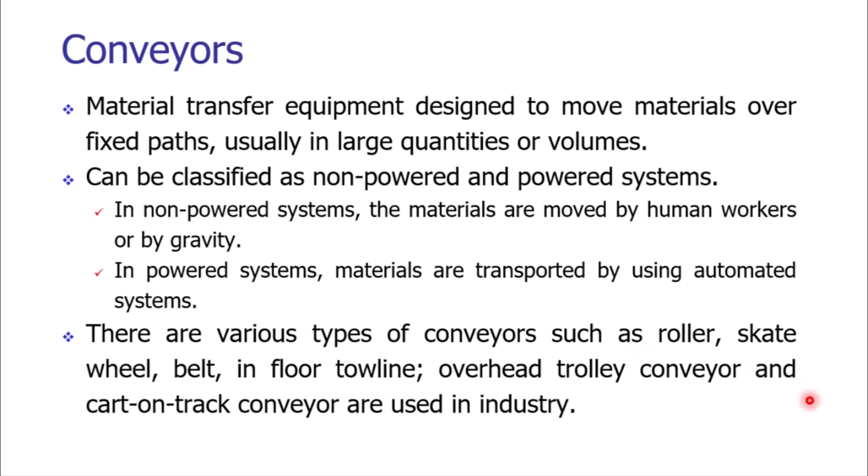The roller conveyor is the basic and simple example of the conveyor system used in the automation. It comprises a series of rollers which are perpendicular to the direction of travel. The construction is very simple. We are having two frames, two guideways, and there is a set of rollers which are connected in between these two guideways. We are using the rolling friction here. The cartons which are having flat bottoms can be easily conveyed over the roller based conveying system.

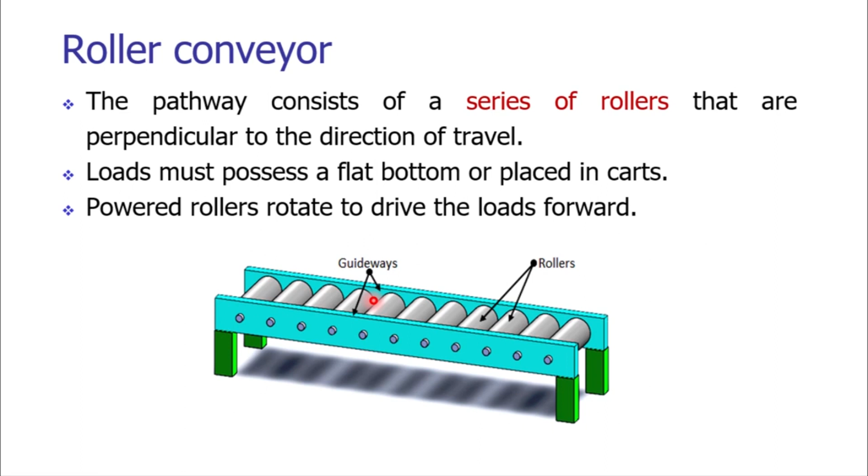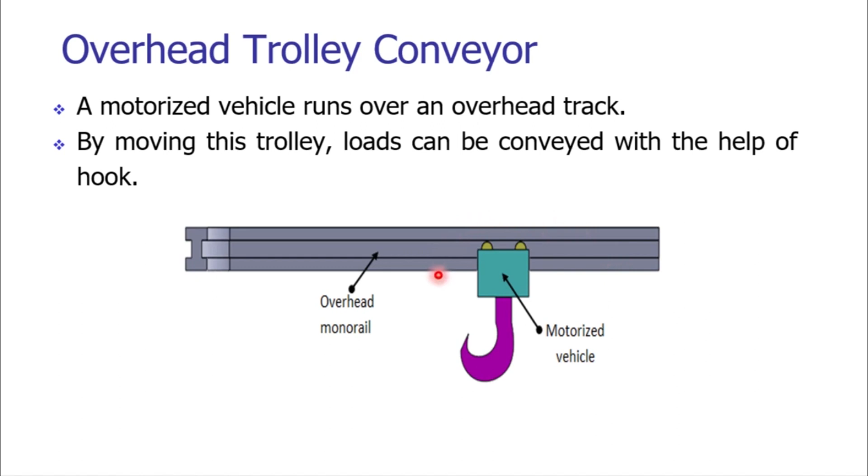We can have the overhead trolley conveyor. By moving the trolley, we can easily convey the objects with the help of a hook. Over the overhead monorail, we are having a motorized vehicle and it has the hook. We can hang the work part in the hook and then we can easily convey the work part along the length of the overhead monorail. So these type of arrangements are basically used to convey dies and molds.

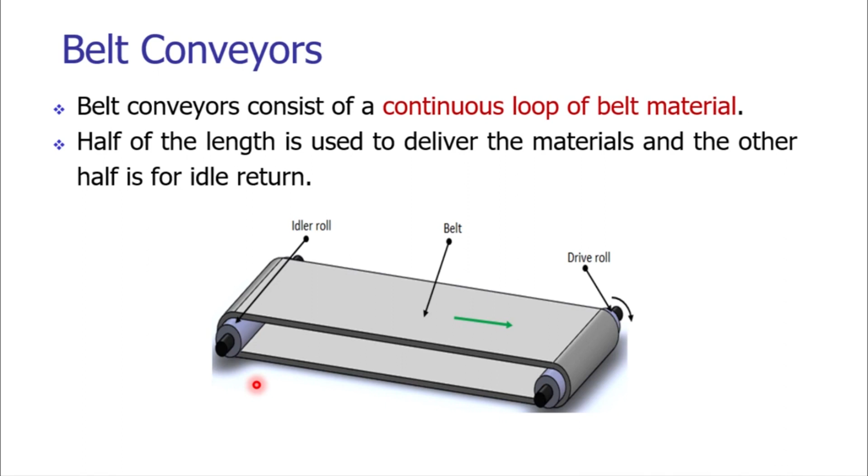At any moment, you can notice that half the length of the belt is being utilized for the conveyance. However, the remaining half will not be utilized for the conveyance. That you can consider as a limitation of the belt conveying. We can have two variants of the belt conveyors. These are flat belts and troughed belts.

Belt conveyors are commonly used to convey light to heavy, solid or loose commodities such as food grains, sugar, cement bags, coal. Belts can also be used to convey flat material or flat bottom material. This flat bottom material may be cartons or the boxes of the products.

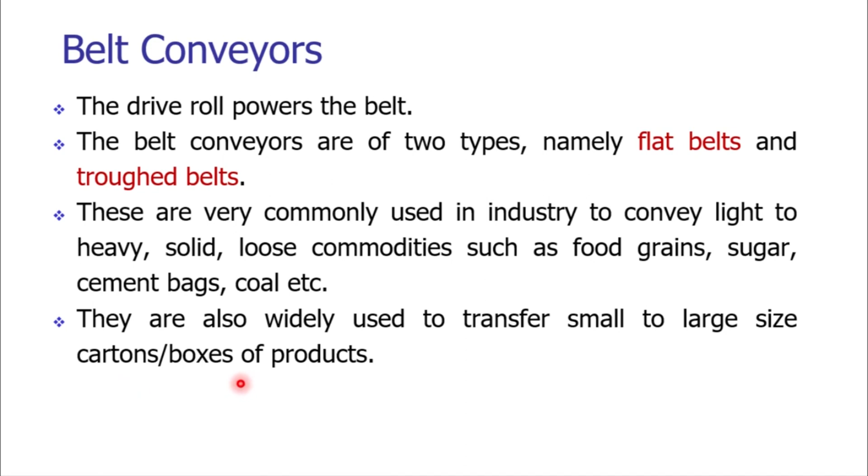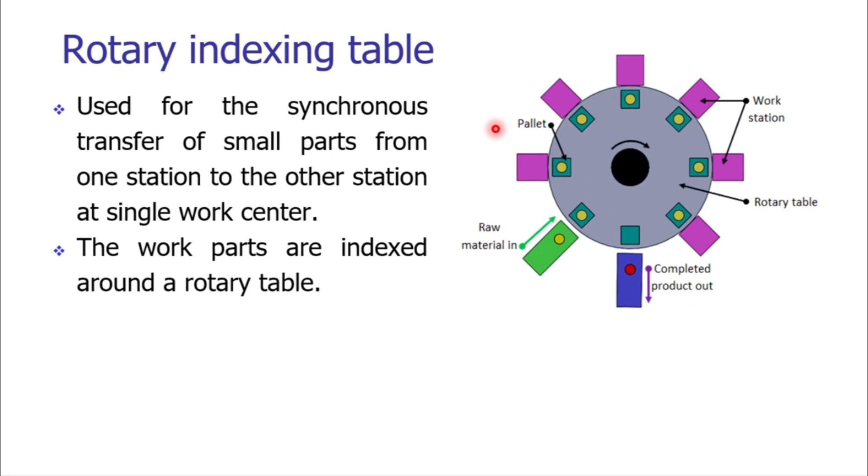So we can summarize this as: the workstations are stationary while the table is rotating, and the workstations are arranged around the periphery of the dial. The rotary indexing table is also called the dial index machine. The parts riding on the rotating table are positioned at each station for their processing.

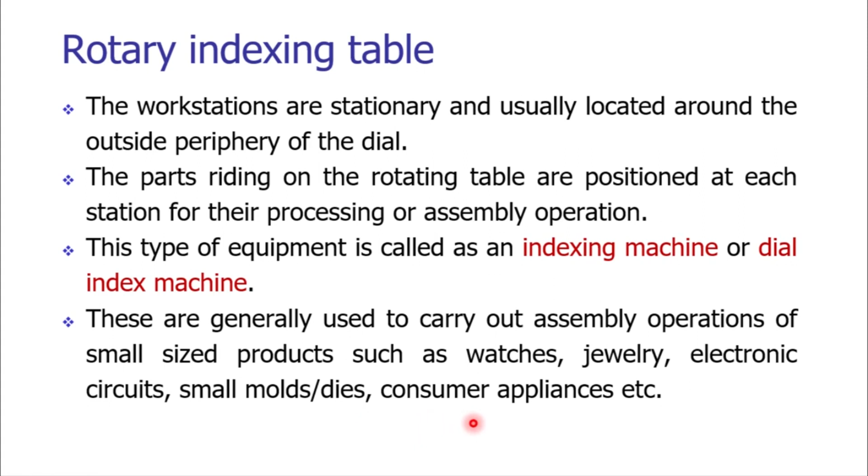The rotary indexing table is generally used to carry out various assembly and processing operations required in watches, jewelry, electronic circuitry, assembly of small molds or dies, and to develop the consumer appliances.

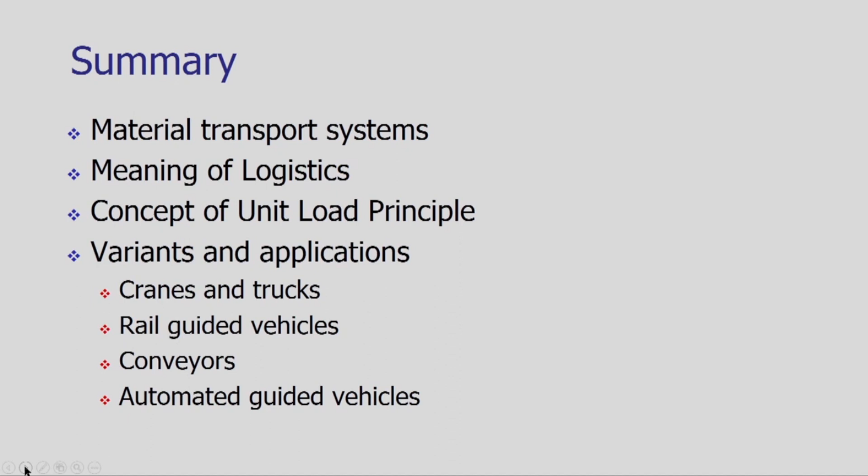Well, my friends, let me summarize this lecture. In this lecture, we studied the various material transport systems. We studied the meaning of logistics and the concept of unit load. After that, we had a detailed discussion on variants and applications of the material transport systems. There are many types. We have seen the cranes, trucks, rail guided vehicles, conveyors, and automated guided vehicles which are used in the automation industry.